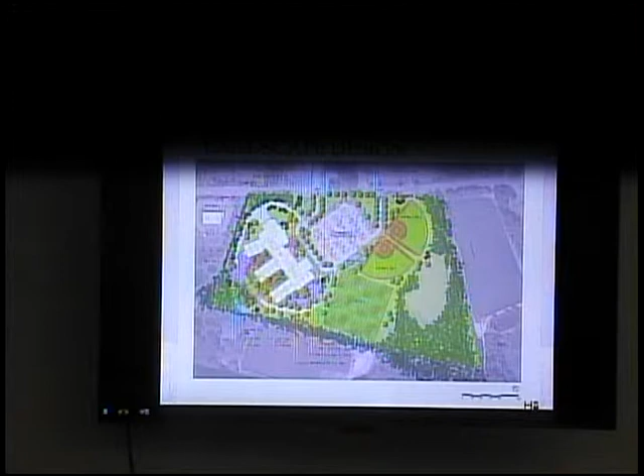Okay, so we have 5 slides that are associated with the landscape and the site. And so we can go back and forth on those if you have questions or if you need to get a closer look. This is an overview of the site, and we have some blow-ups of certain areas that help you sort of zoom in and get a better handle on what some of those areas represent. So you can see from just a quick overview that we've taken all of the thoughts and the considerations that you had presented previously about the direction of buses, where drop-off might want to be, the playgrounds, the fields, how many fields, parking -- this plan has taken into account all of those things.

Is there not a little pointer thing? Okay, well, I'll be fine then.

To start with, the entrance on the right side, the arrow there, that's where the entrance into the site is. And circulation is in that way and out that way.

Drop-off for parents is along the front of the building. For buses, the circulation is you come in the same way, and then you divert to this fire lane and bus route to the back of the building. Drop-off occurs there, and then buses exit out the left side.

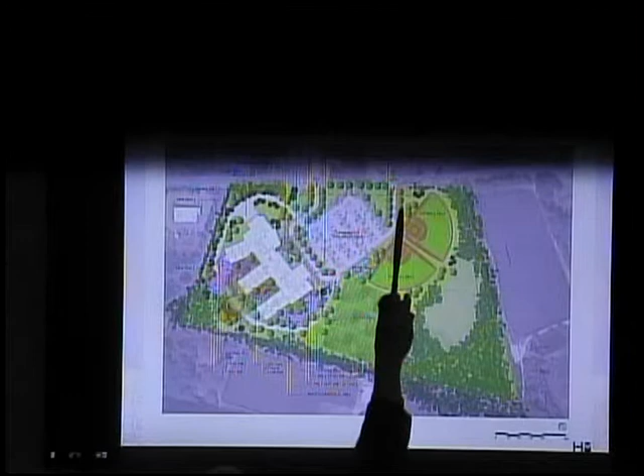Right, no, I understand that. I just want you to go over the route again. The trucks are not going back here at all. So they're gonna come in from here, along here, take this right, go straight around to here, back up, and then go back out that way.

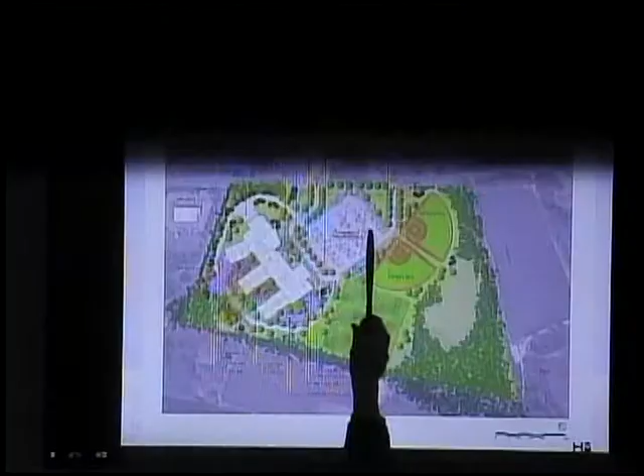It's a parent drop-off parking area. But you could easily have them come in the back row and loop around to avoid those front parking spaces where the parents are. You might be able to, with this radius, you'd lose some parking here. You'd lose some parking, but maybe that's the solution, to keep them away from where you have the parents coming in and out to pick up a sick kid or something. The back lot will be stuffed with teacher parking.

The thing is, parents don't come in and out that often, so that when the trucks are coming in at 8:30, they're already gone. They already all know that if they're at a place when that's happening, they have to stay until everything's moved on. Those trucks aren't gonna be parked there, they're just gonna be moving through it.

I think it'll work fine. I'm comfortable with that, I agree. That's how they need to enter, drop off and deliver. We don't want them in the back. We don't.

So two more questions on the trucks. Is there enough turning radius for the bigger trucks in the parking lot, with all the cars parked along there - will they be able to maneuver where the cars are parked? They will. Niche Engineering ran a truck turning radius template for this entire sequence of trucks, buses, etc. We had to remove about 2 car parking spots and stripe the area to get the radius. Right, we've lost some parking here for that reason.

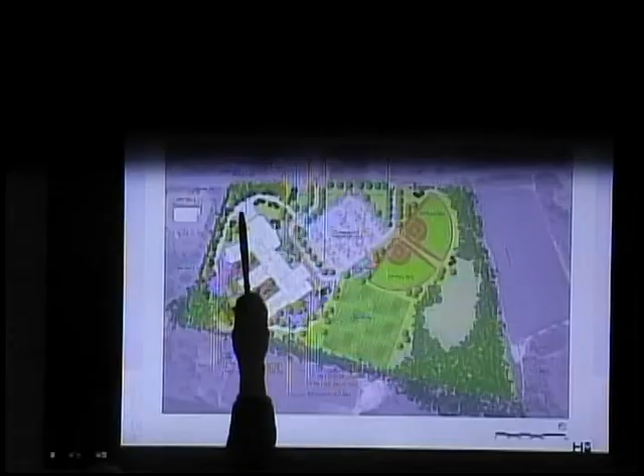And then the last question on the delivery part - when the truck is backed in to deliver, are the larger trucks completely away from the fire lane, or might they be? I can't tell the scale. It's 50 feet from the inside radius to the loading dock, so they should be outside the clearance of that fire lane.

What's the length of the longer trucks usually? Trailers are 53 feet, then you've got another 20 feet of tractor. So the question is whether or not, if they're backed up to the loading dock, they could block any of the road, or are they far enough away that they wouldn't block it? They'll usually jack the tractor around to back the truck into that loading dock - they're gonna have to have the tractor jacked around anyway. It's gonna be interesting to see how they jack it around the other way to get back out.

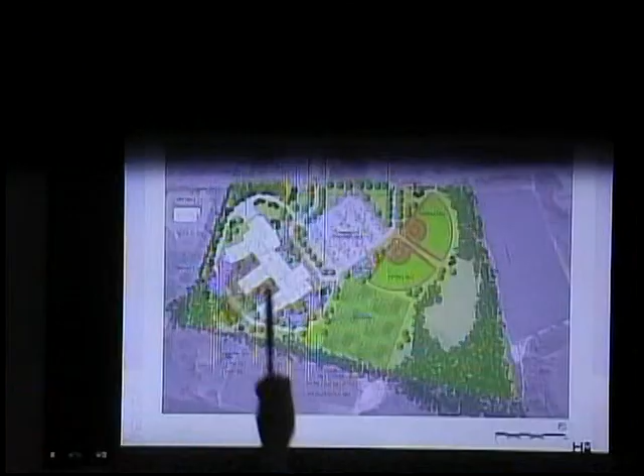Yeah, we did a WB50 turning - it's a computer program that takes the truck size and actually shows you the wheel positions. We ran into a couple of locations where there was a conflict with the curb, and we adjusted the geometry of the road. The templates are very conservative, so drivers can do much better than what the template is saying, but the template tells us that we can do all of this.

Would the template allow for a WB63 to go in there? I don't know - with a good driver, probably, but I don't think we've run it with that. I'm only asking because initially we may have some big trucks with furniture coming in. You always have the option, for a summer furniture delivery, of going into the front door instead of the back doors, if there's no kids there. Right, exactly. So the door will have - WB50 is fine.

The front door will have double doors with removable mullions, so occasionally - I understand you don't want to do it every day, but once a year - you need to take that mullion out based on what it is. You also have them back down the exit in the summertime for furniture deliveries. Plenty.

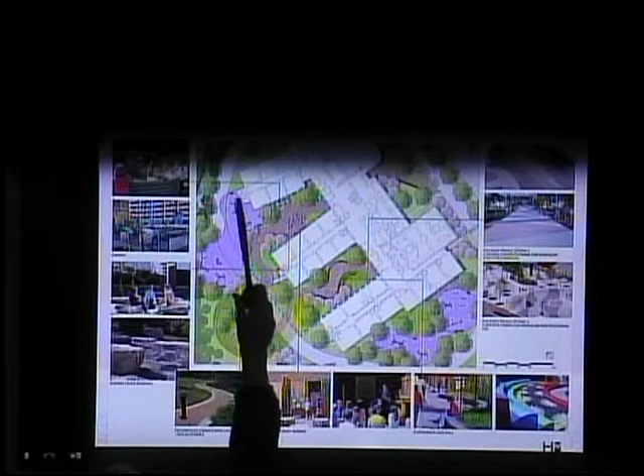So these are the outdoor classrooms for grades 1, 2, 3, 4, and 5, and also playgrounds for 1, 2, and 3 through 5 here. This is an outdoor play area that's mostly lawn or plantings, but it also has a lot of contours in it, so the kids can run up and down the manufactured or man-made slopes we're looking at here.

These areas are the beginnings of what the future build-up might look like. We're just getting into DD, or in the middle of DD, so we're looking at those now. As part of the base bid, those are basically going to be lawn areas with a curved asphalt path that runs from here to here and there to there. But in the future, that's the intent of what it would be.

You can see some ideas we've been throwing out - we haven't gotten feedback on any of this yet. But the idea is in this area we'd have an outdoor sitting area with potentially a classroom. This here would potentially be an outdoor kind of chalkboard where an outdoor class could happen, and some type of seating area like this or like this in this zone. There would also be some mounding in some of these zones to create a little bit of excitement in those areas.

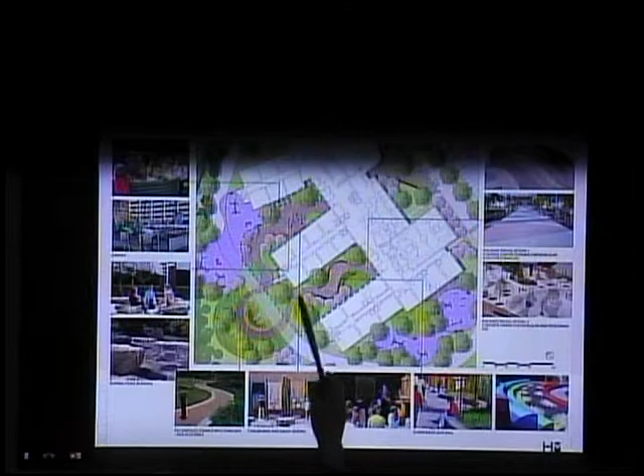In here, we're looking more at a kind of seating area, where it could also have some outdoor instruction, but it's also a place where kids can just run around - we're not trying to keep anybody from playing in here. We intend to have some hard surface and then some soft surface for that same kind of thing.

These are just some different ideas of what that might start to look like. We had talked about having some outdoor areas here for a potential outdoor garden for plantings. The idea was that kids would want a place to grow vegetables or flowers starting in May, and then someone might have to take care of them for the remainder of the summer, but they'd be there in the fall when the kids came back.

Picking up on the gardens, is there a sense of how that would be cared for and who would be in charge of it?

The Y program is perfectly willing to do the summer care. They enjoy that because it's all of our children that are there all summer, four days a week, which would be plenty. And then the science program we use has several growing units in every grade, so I think this would give them the opportunity to grow things outside as well as inside during the temperate time of year.

The last time you were at the elementary and explained some of that to the teachers, I had three teachers come to see me afterward to say they'd like to be involved in that process - helping with the design, talking about it, and taking care of it throughout the school year. So I'm pretty confident we'll have several folks interested, and as Liz mentioned, the Y absolutely wants to help. They currently have something they use in the back for a garden, so they would love to take that over. And the custodians grow tomatoes every summer.

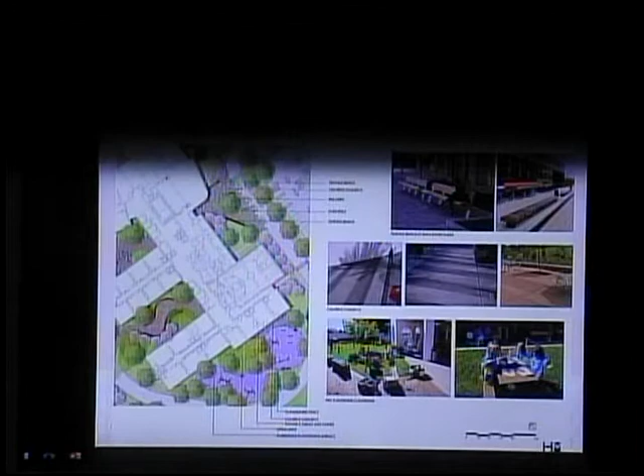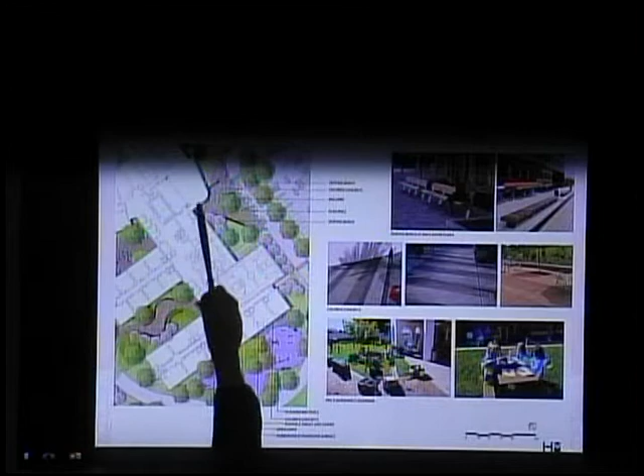Here we go. So in this zone would be where the pre-K and kindergarten have their outdoor play areas. And this area certainly is the front of the building, the front entrance. So we have some images of just some ideas of what that might start to look like, with some seating, with maybe some different types of pavement colors to bring a little bit of excitement to the front entrance.

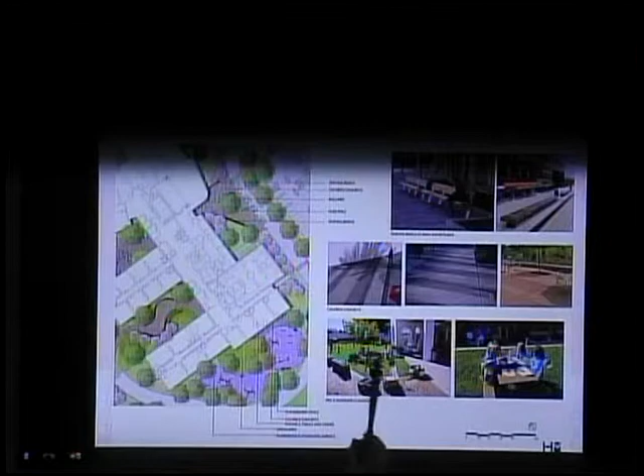And these here, both of these would be the green areas that you see here. These are the play areas that are actually play equipment, but these areas here might start to look more like this or this, where you have a little bit of lawn where there might be some movable furniture, or some toys or equipment brought outside, that kind of thing. The pre-K classrooms have doors that go directly to the outside, so they'll be able to go right out to that area.

Is it the same with the kindergarten? Kindergarten doesn't have doors directly to the outside, but they have a door at the end of the wing. So that would be their route to get out to the playground. They won't be going to that playground though, right?

They'll be going... Chuck, do you want to point out which one? The kindergarten is here. So they go out the end of the building to get to that space. Correct, absolutely.

Is that because we have 6 classrooms that will all be using that playground area? If you made doors directly out from the kindergarten, the 3 classrooms on the other side would have to go out and around. So everybody goes out the end and then they can go to that area. Every time we have a door in the exterior envelope it's a problem, it lessens the thermal value of the whole building, and it's another point of maintenance. So for lockdown, we have it at the pre-K, it's only 2 doors for the 3 classrooms, but for the 6 kindergarten classrooms, we thought it'd be better just to use the end door.

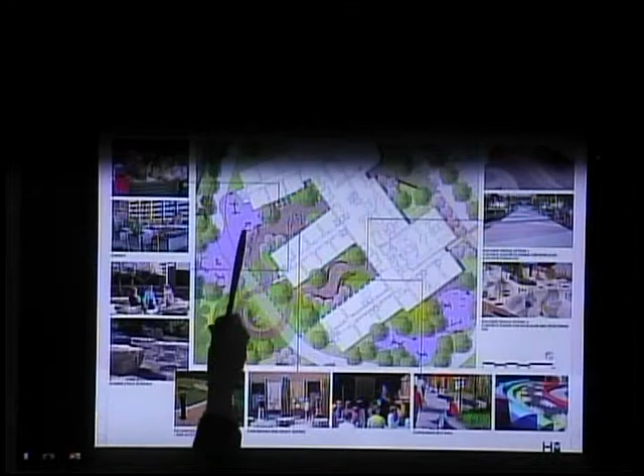It's intended more for educational use, but we can go back and look at the playground too. In fact we'll probably see it when we go to the next slide. Here's the playgrounds for 1 and 2, and then 3 through 5 here. And the idea is that this is going to be an asphalt drive around.

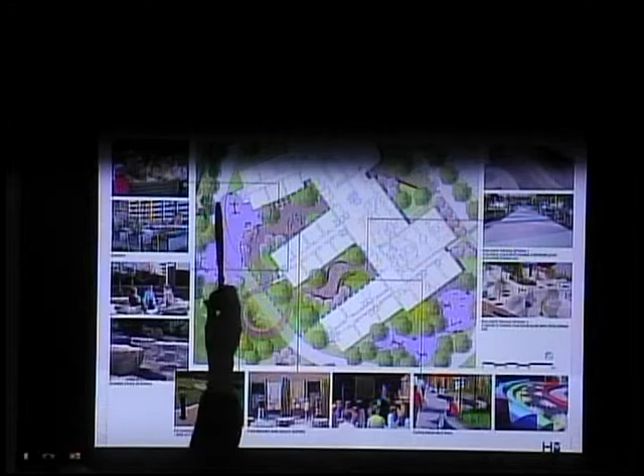We're thinking this is going to be resilient type pavement, so that when the equipment is on top of it, if there's a fall, it's a good place for someone to fall and not potentially get a broken arm or leg. This would still be asphalt, but we're looking at colored asphalt so that all these different kinds of shapes sort of flow through. We're not looking at colors like this, but the idea is that these shapes would flow through here, and so the idea that this is a fire lane would kind of disappear, becoming more of a play area or outdoor area for the kids.

Imagine we put striping on it for foursquare or other games. So it's a good way to use the asphalt we already need, but double function for play purposes. We don't have to build a whole other hardtop area.

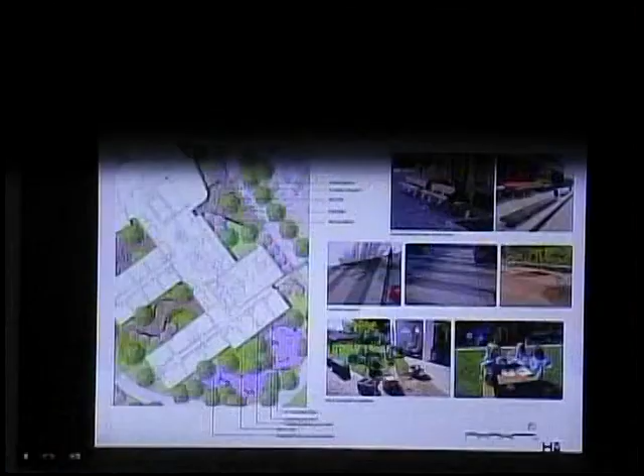In the last slide, or the second to last slide, we start to show some of the ideas of what the equipment might look like. These are some of the newer types of equipment you're able to get these days, and it's pretty nice, very sturdy. These kinds of things can get 5 or 6 kids on it. So instead of having a typical swing that takes up so much space because of the fall zones required in the area you can't play within, these types of things let you get a lot more kids playing within the same square footage.

There's some different climbing structures that we've done in a number of different locations. Just trying to show a couple of different companies that we used and what those things might start to look like. There's another one, too.

You can also build a slide into the hill on the other side, can't you? The hill in the back, yeah, like on the soft side. We could, I've seen that on a lot of playgrounds. That way the kids don't fall down the stairs, they just walk up the hill. That's a great idea.

The swing space is complicated because you have to have the entire arc of the swing, and then you're supposed to have a knee-high barrier that no one crosses into the swing zone. That's where most of the accidents happen, kids get knocked down. So for the amount of area that a swing set takes up, it's not like the days when we all grew up, it's all different. The amount of area a swing set takes up is for 2 kids, and we've sort of lost a lot of this area just to have 1 or 2 swings.

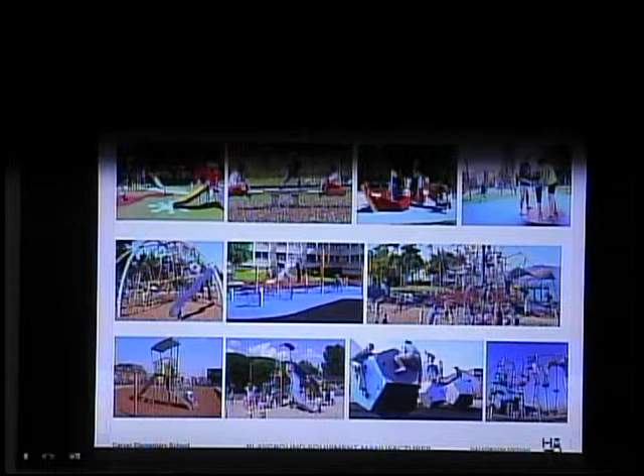So there'll be one grade out at recess at a time, the entire grade? That's what we have currently, and that's what works best based on our current campus.

So I'm looking at this, and I'm actually wondering if that grade 1-2 play area might be switched with the 3 through 5. I don't know, I'm just thinking we might want to tweak that, but your question is...

Again, we would likely have one grade out at a time, but the playground's separated like this. For example, kindergarten can have their play time anytime, and they have 2 recesses throughout the day, so that isn't going to interfere. And when you have 132 children out for recess at once, that's a lot of children, so yes, we tend to have one grade level at a time.

So when you say 1 grade level, you mean all of grade 1 or all of grade 5 would be out at one time? Yes. And how many classes is that at one time? Is it 6? So it's 6 classes of grade 5, say? In kindergarten, 7. And the range is from 122 to 138.

138, because another way to think about it might be that if you're going to have all of grade 5 out, and that's 25 per class, that's probably being generous, right? 25 times 6 is 150 or so. Yeah, that would be our biggest class.

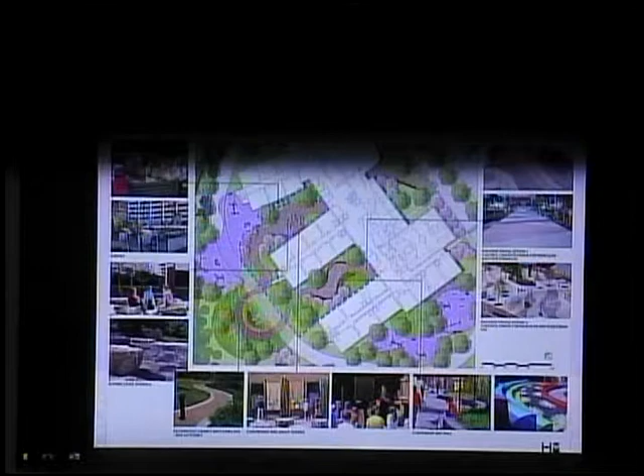Why don't you talk about that, it's a good idea. So a little bit of a more boring topic would be irrigation. I want to discuss that, the areas that we're showing as being irrigated, to make sure we're all on the same page.

Presently we're going to be using existing well number one, right about there, which is going to become the irrigation well. It pumps about 70 gallons a minute or so, and the areas we're showing as irrigated, that well will be able to handle that amount pretty much right on, because we can't go much more than that. With 70 gallons a minute, it'll be able to handle it.

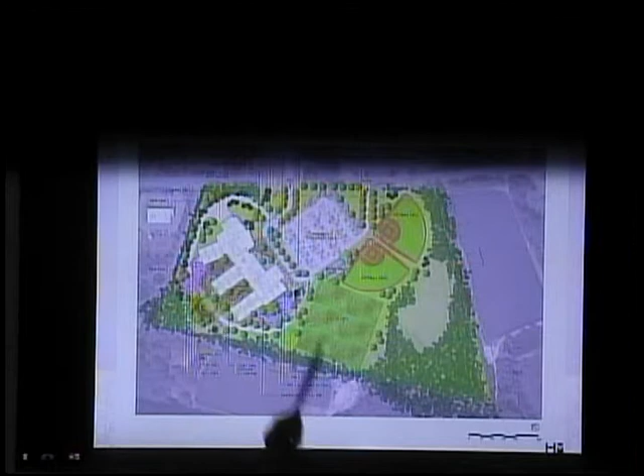Does it have to have the underground storage tank for the fire suppression? And so where's that going to be? Right in this area here. The grease trap will also be in that same area.

That's a good place. Will there be any fencing around the athletic fields? No. Do the softball and Little League fields need fence? None of our existing ones do. There'll be backstops, of course, but no outfield fencing - none of our existing ones have that.

Will there be fence around the basketball court? Is that something you're planning, Chuck? We had talked about a fence on this side, to keep the balls off the road. You can see it right there, actually - you can't really see it, but it's there, it's drawn. So it's a fence on that side.

Those courts will be used 24/7. I can go to the high school at night today, because we've got an outdoor one over there - there's kids playing out there at 10:30 at night, neighborhood kids, so they'll be very well used.

So what is more cost-effective - a fence on that basketball court area, or a row of sort of a natural barrier of trees or shrubs? Because all we're looking at is preventing the ball from rolling into the parking lot, correct? Well, it's mostly visual - it's a barrier for kids who are playing and get carried away and want to run off the court to try to make a play, and you're right up against that road.

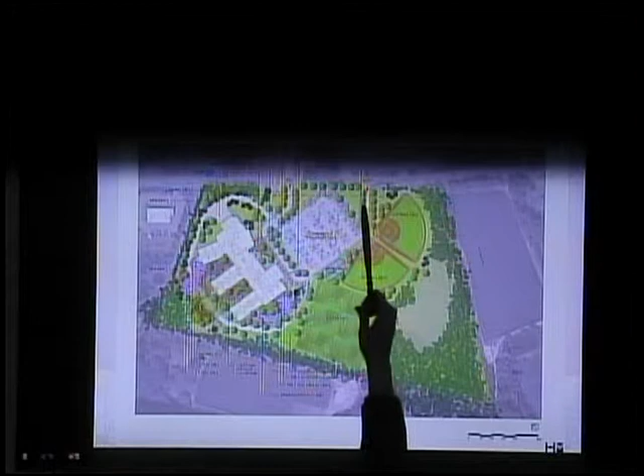Chuck, you want to point out the entrance sign? Sure, and there'll be an entrance sign right there. It actually says - stay right there.

We're not planning on any kind of reader board, just the name of the school. The thing is, the most effective communication tool in our town is that marquee, where you can put parent conferences.

We can put that in as an add. We advertise with the basic sign if we're running under budget - I think that's one of those items we can take a look at. You don't have to decide till later in the project. Or we can use our building use fund, that's how we bought the one at the high school - we charge outside organizations.

Actually, what we did for the fire station is, in the base bid, it requires all the electrical and the structure to be built. We found out it was about 4 times as much to put it out to bid than once all the electric's done - we can just go buy the sign after the fact and plug it in. That's what I mean. Dave, didn't we do something like that?

The building use fund accumulates very fast at the elementary school because of the Y program, so in less than a year we could put up a sign. It's the most effective communication tool we have - a manual reader board, not LED. With the new school we'd like to go LED, but right now it's a manual marquee.

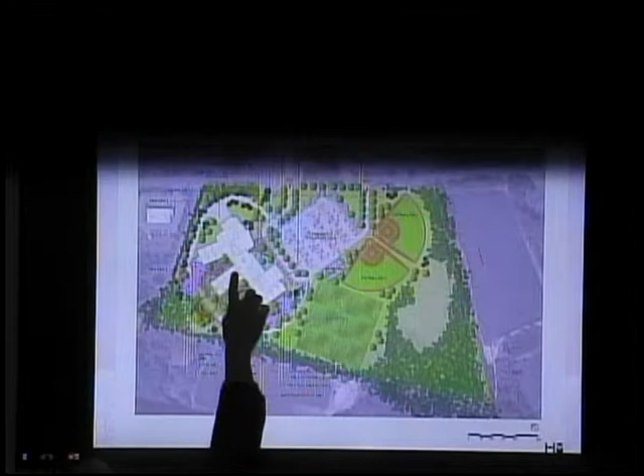You mentioned before about phasing a portion in with asphalt - can you go over that again and explain it in a little more detail? These two areas, the base bid on those two areas, there's no add alternate for those. The base bid is grass with a curved asphalt walk that takes on a quick little shape like that, not all that you see here.

The intent is that another company is being targeted to provide those as part of a gift to the school. So we're putting in the base bid, those are gonna go in, and then at some point that company's gonna come in and install those after the fact. We'll provide the full design documentation, then it's done as a separate project. But unlike those other areas which are add alternate ones, these are not.

Liz, what's the status of the Makepeace? I heard from them yesterday and they're very eager to meet with us. They're bringing in not just the neighborhood fund people, but other people in the company, and I think they really are gonna make a commitment. I don't know what it's gonna be yet, we're gonna set up a meeting with them next week. So I think it's gonna be a go, but how much we'll get, I have no idea.

Because we have $234,000 for the excluded alternate from the project. So that was what the budget was for building that, provided we get funding. I don't have a hope we'll get $234,000, but we'll get a start on some really good outdoor classrooms.

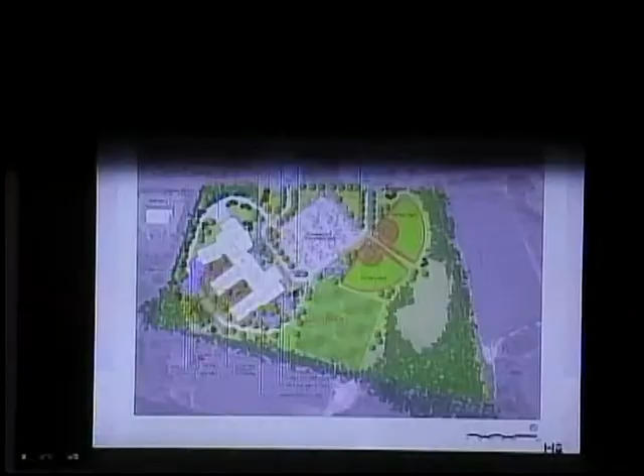Thank you, Chuck. Thanks, Chuck. Thank you, Chuck.

So now I'd like to go inside and just show you a lot of it. What we've done is focus on individual spaces.

Mouse dead. I'm doing it. Oh, now you're doing it. Thanks.

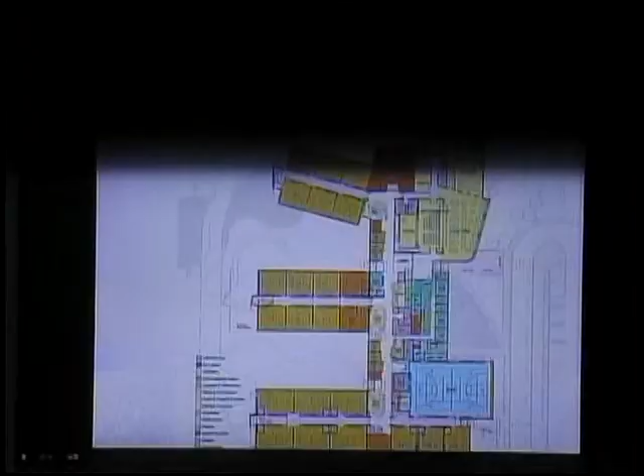So just quickly, on the overall plans, there's really not been any drastic changes since we last presented it. It's really just developing some detail and articulation. We start to put furniture into the spaces as a placeholder layout just to check how we're doing in proportions, and where entries, features, and walls are going.

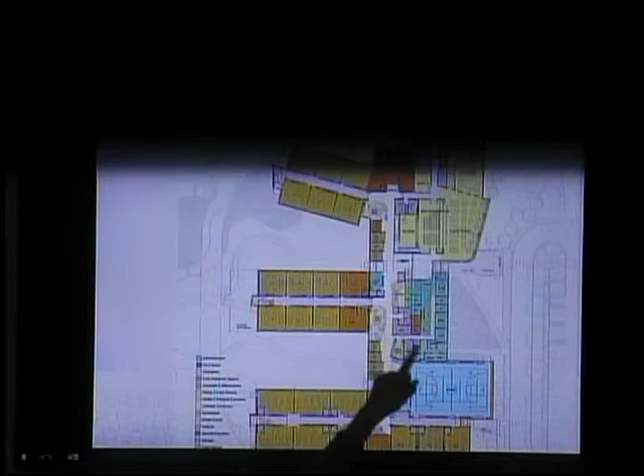But really, it's largely the same as it was. There's been a lot of development around the project areas, which were kind of left blank up until now. We're starting to check seating in the cafeteria, putting in mechanical chases and diffusers.

We're developing the book collection with a story room and some of the smaller offices for the specialists. So let me just jump into, unless anybody has a question on the overall plans, the individual spaces.

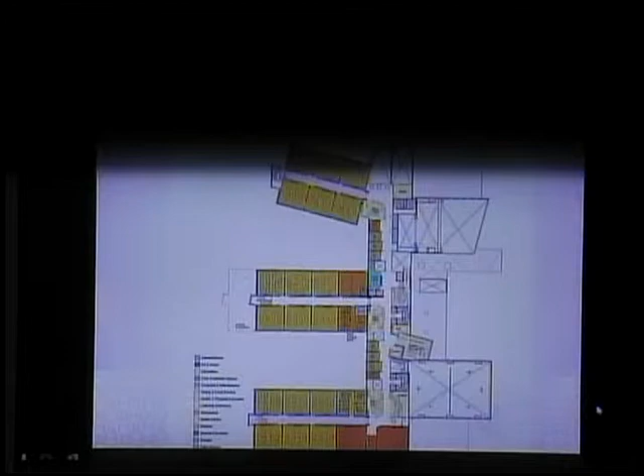Now, the first couple pages, I understand there's been some printing problems, so you may need to look at the screen. The first one we'll look at is the cafeteria and the multipurpose room.

And I want to start with the plan that has the two rooms with the operable partition in its closed position and the two different furniture layouts. So this is the cafeteria with its dining, and then a multipurpose room, which will normally not have seating in it, and it'll be for activities. But we're showing you how many seats could fit in the multipurpose room when the partition is closed as a small kind of performance area.

And what we're showing is about 143 seats, all looking at the stage. There'll be a roll-down projection screen within the proscenium of the stage, or the platform, and a ceiling-mounted projector, which will project onto that screen, so you don't need to roll the cart into the space.

So that can act as a kind of mini assembly space, even while the cafeteria is all set up as it is. The tables we're showing in the cafeteria are just a first stab, and we'll be getting more input about the actual furniture preferred. But using a mixture of round tables and long tables, this gives us a seating of 285 as we show it. I know there was a request to get as many as we could so you can be ensured you've been able to get 2 grades per lunch period if we have 3 periods.

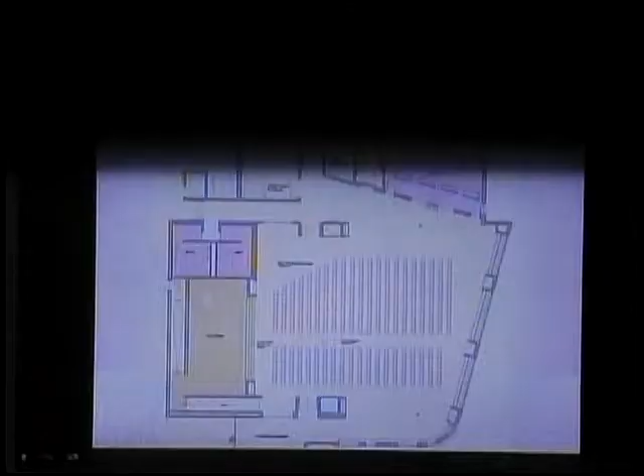We could probably get more chairs in, but there's a point where you get too far away and the sight lines aren't very good. So it's good to be realistic about how many you can get in there.

The partition we're looking at is a manual partition with 2 panels hinged together, and then each 2 panels are hinged together, and they get slid out along a ceiling track into position, with a pocket on either side where those are stored. It's fairly easy to roll them out and stack them together to form the complete wall.

Again, we have the gang toilet rooms, immediately accessible off that cafeteria through the double door up there, which would normally be open for school use, but could be closed off and locked so people don't have access to the rest of the school.

There are ramps which come up to the platform, one from the multipurpose room side and one from the corridor side, giving quick access to the 2 music rooms on that end. So they can be staging in the music room and come directly out onto the stage without going into the cafeteria itself.

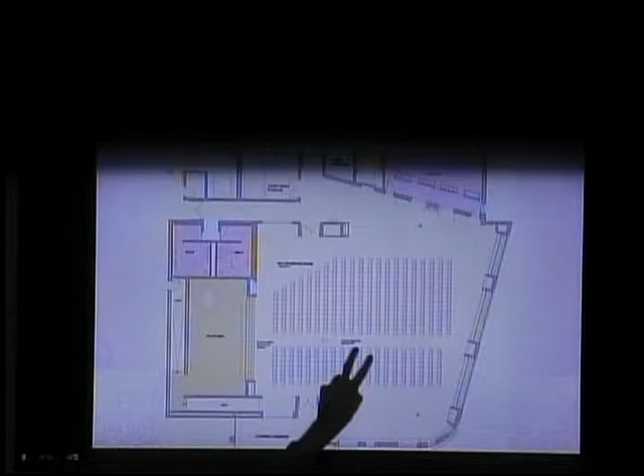You can start to see the beginning of the kitchen equipment with a service line. The students come in from the 2 doorways on the ends, then circulate toward the center picking up their food, and come out those two larger openings with cashiers on either side, continuing out into the cafeteria.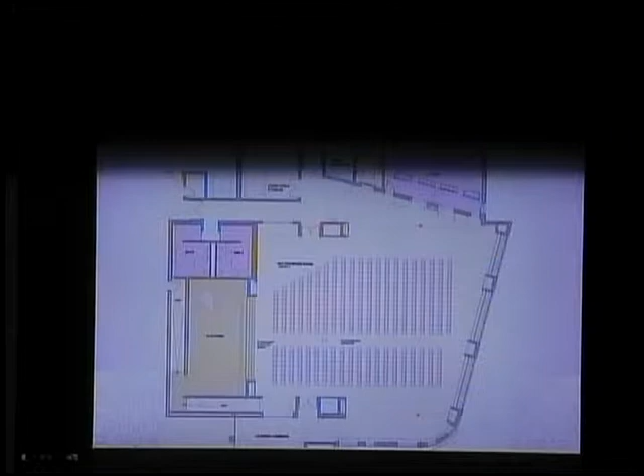But it's not a stage yet, because you have to have a whole bunch of different stuff if you have a stage, right? And there are a whole set of fire regulations around that.

It'll have a front curtain. We could have a back curtain along the back wall if you want that. Then some pretty basic theatrical lighting, maybe one bar of lights or possibly two - one facing the proscenium and one within the stage itself, using a fairly simple package lighting system where you have scenes set up and programs so you can just choose which scene you want. You don't need somebody with lots of expertise to run it. And then there'll be a sound system, a pretty basic but good sound system to go with it.

So the next slide is the gymnasium. This will have a poured synthetic athletic floor system. That's the extent shown in the pale blue color.

The entrance to it from the school is up the top. Those three doors there come directly in off the Learning Commons. It's also possible to enter through the pre-kindergarten corridor through these doors, and then for after-hours use through these doors here and in here.

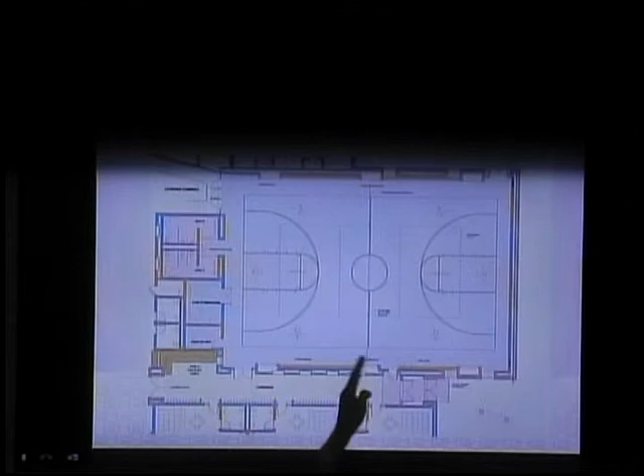There'll be a single bench on both sides, but in different positions on either side of the curtain. That bench, as we've done in other schools, can fold up so it's out of the way, or it can be in its down position and provide seating for maybe about 50 or so people on the sidelines.

There's a gym storage room here, and a health office in that location.

I think that was something—yep, that was a request at one of the early meetings.

We looked at wood versus synthetic flooring and life cycle durability. Cost-wise, it's actually probably a little bit cheaper than a wood floor. Dave had weighed in on that one, and you guys are looking at the same options over at the high school, I understand.

That's the preference. Up at Christa McAuliffe School, they had a wooden floor, but it was bamboo, and the physical education person I visited there didn't recommend it. It was very soft, and over time cracks became catches in the floor.

So the seating for parents or kids, we're looking at—is it similar to the middle school gym, how that has the 50? I'm trying to still picture how it folds out visually there.

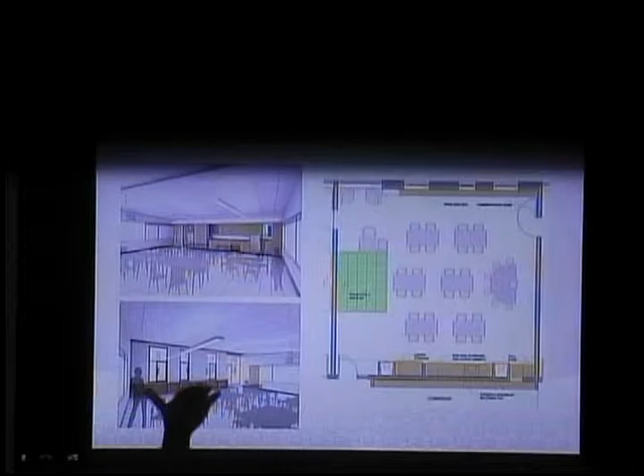However, sloping it up to the exterior allows us to get the heads of those windows pretty high to maximize the amount of daylight getting into the classroom. The slope actually helps bounce the light further back towards the back of the classroom, so we're really maximizing the amount of daylight being used. In combination with daylight sensors on the light fixtures, we're really driving down the electrical lighting use in the majority of the school when you look at it in terms of overall square footage.

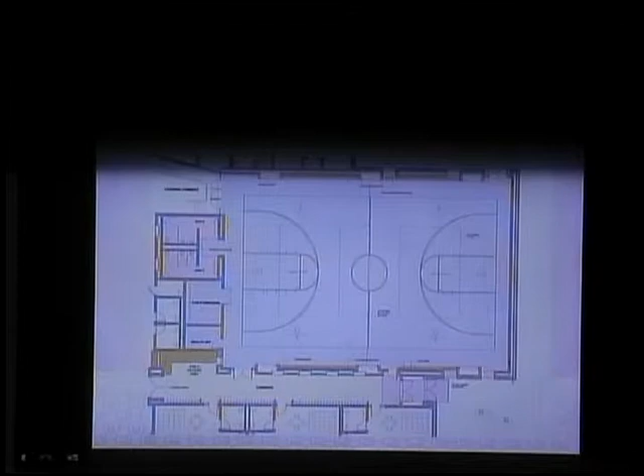Thank you. Can I ask you a question, Matt? That window there, on the drawing it looks like there's some seating there. That's a full-length window. Can you go back one? Yes, this one. The floor to ceiling window comes down to within about six inches of the floor. Oh, I like that. Yeah, it's a place where the students can get up close and have a close connection to the outside in that moment.

In the science program, there's some mirrors and reflective experiments that we don't currently have any light for. That'd be an ideal place for this.

Next time we're going to show you some of the exterior development. You'll see how that plays into our thoughts about the way the building elevations are shaping up on the classroom wings as well. Okay, we're getting there, for whatever reason, slow.

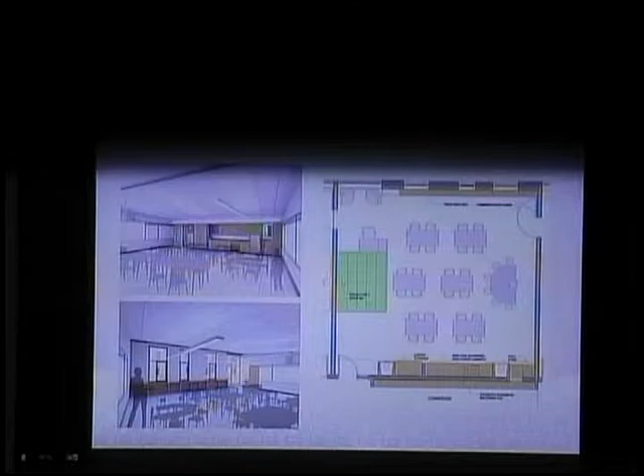Next will be the kindergarten classroom. So that's really a similar layout to the typical classroom, except it's about a third longer. It's the same depth, but just longer, because those are 1,200 square feet as opposed to the 900 square foot typical classroom.

Those also have a dedicated toilet room within them. The fixture sizes will all be at the heights appropriate for this age. Again, there's storage along the corridor wall. They have student storage out in the hallway in the corridor. These are open cubbies as opposed to the upper grades, which have lockers with doors, but it's the same width and same space that it takes up in the hallway.

So again, you have the entry door. There's a teaching wall, whiteboard, and projector. We're showing a rug that can be included as part of the furniture package, or two rugs actually. And then a layout which allows for the student tables plus a number of activity centers within the room, an activity table for the teacher, and a teacher workstation close to the teaching wall. This has open shelving along the perimeter, and the other walls allow for additional whiteboard space.

These also have communicating doors between rooms. On the end of the kindergarten wing, because these rooms are larger and in the eyes of the life safety code can have more than 50 people in them just by the sheer square footage, even though they won't actually, we have to treat this as needing two means of egress. So one means is out the door, and the communicating door acts as the second one, but on the end classroom we have to include an egress door to the exterior. But that's just for egress - we won't have hardware on the outside.

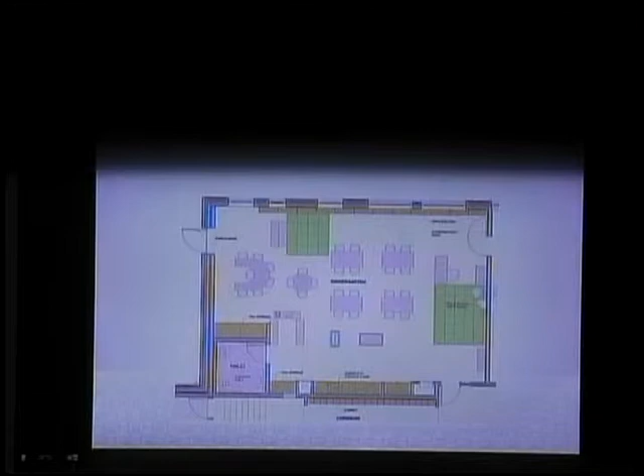Next, the pre-kindergarten classroom. It's similar content, just oriented in a long dimension. You enter in off the corridor on the top, and they have cubbies in the hallways as well. In this case, the storage wall is along the demising wall between the two rooms.

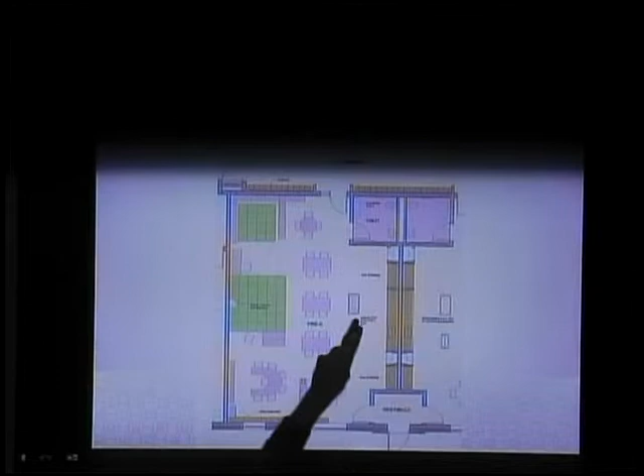With the sink, the displacement diffusers, the tall storage, and the cabinets, it also has a dedicated toilet room, and a very long teaching wall with the whiteboard, marker, and projector, plus some shelving along the exterior wall. As I mentioned, they have doors out to the playground directly, so we provided a small vestibule for a good airlock condition. These two rooms access this one vestibule to that door to the exterior, and you'll be able to come in and out that door.

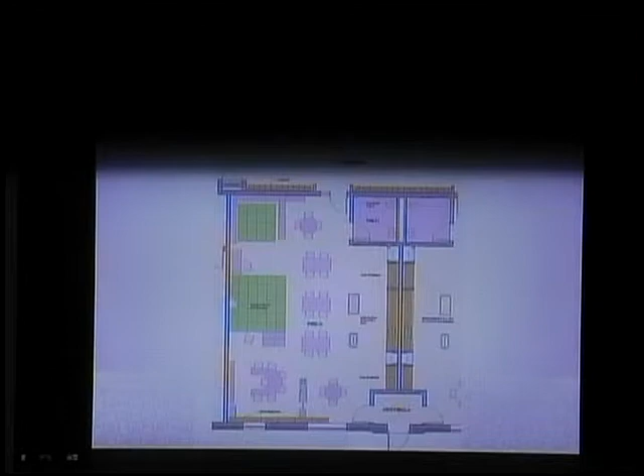SPED. The SPED classroom occupies about the same footprint as a typical classroom. It's slightly larger, but it has a toilet within it. In this version, which is the social emotional classroom, there's space for what's called the green room, which is the calm down space. The teachers asked that the access to it be off of the corridor, so that's what we've shown there.

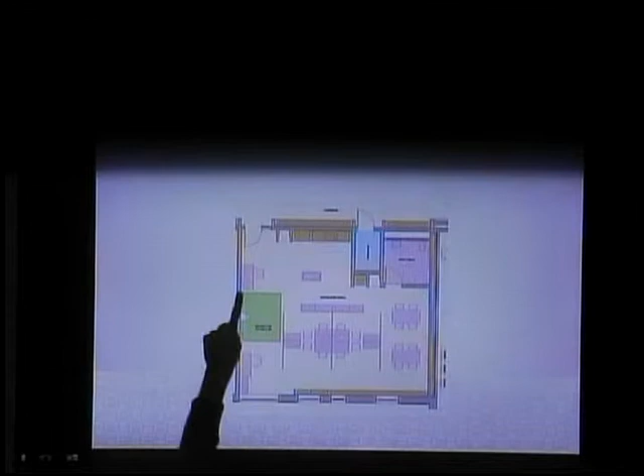Otherwise, the amenities are the same: counters, sink space, tall storage, laptop storage, projector with whiteboard, and open shelving along the perimeter. This just shows a layout with cubicle furniture and small student tables.

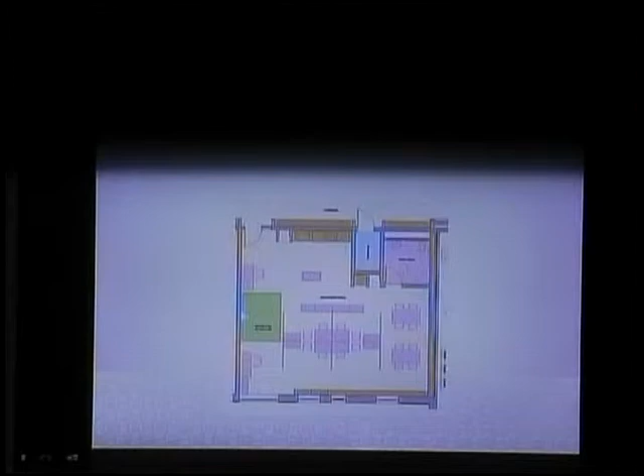The music room. We're showing the pair of the two music rooms, located at the end of the Learning Commons on the first floor. They're a double height space, which is good to have that extra ceiling height for the music use.

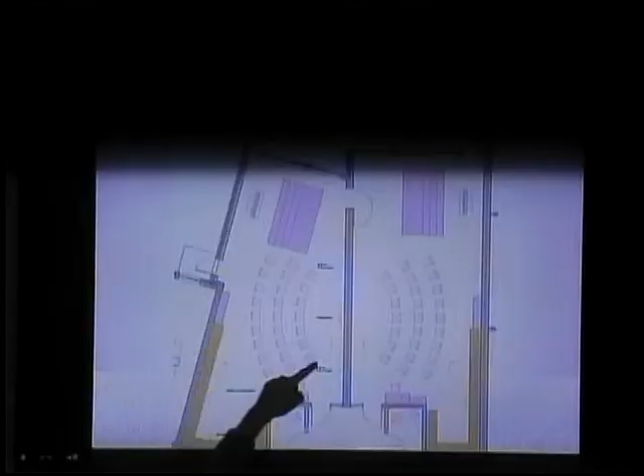When you come into the room, you're seeing the teaching wall. There can be two areas set up at any one time, given the size of the room. You're seeing a teacher desk here, and then some built-ins in this area for instrument storage, as well as some traditional teacher storage and counter space.

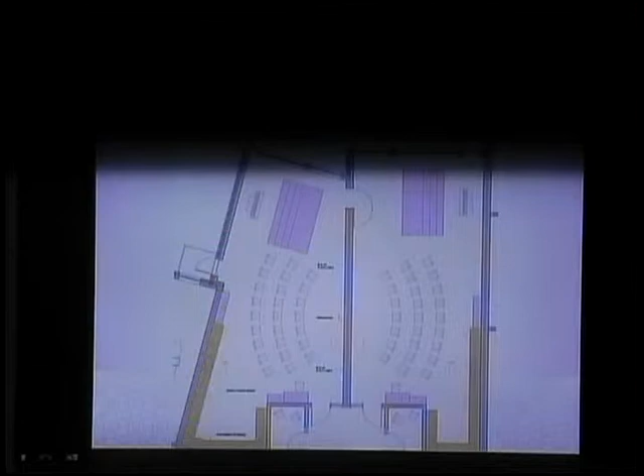Immediately outside of the music classrooms are two small practice rooms, which have access off of this shared alcove, which gives access to all the music spaces. You're seeing a very thick wall between the two rooms, and again, that's to achieve the isolation that we want. Next, the art room.

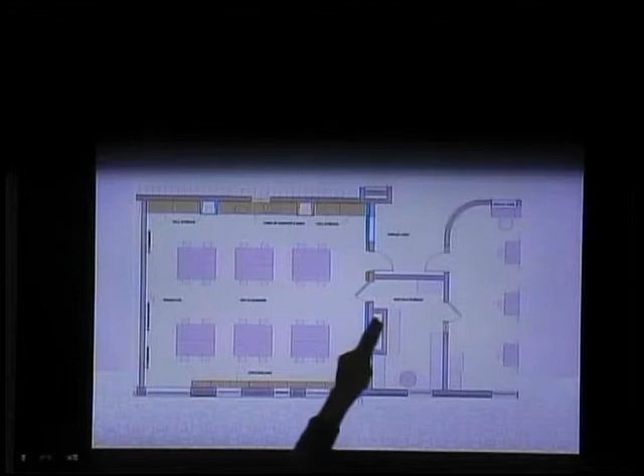In between the two rooms, we've created one large room which contains shelving for art storage, as well as the location of the kiln. This is a bit different than what we had when we talked to the teachers - we had two separate rooms, and there was an issue of being able to get access to the storage directly from each art room. So that's how we achieved that solution.

This looks good. Looks good, yeah. That was a good solution. Yeah.

Immediately upon entering into the space, there'll be a circulation desk, and behind that is access to the media specialist office. The office will have a counter with a sink, but then plenty of space for the other furnishings, perhaps a desk, a table, shelving, and a place for a book drop.

There'll be an interior window from that office out into the book collection for needed supervision. Within the book collection space itself, it's a lot of perimeter shelving. We tried to maximize that as much as we could.

And then in the freestanding shelving in between, which will be mobile, so it'll be on casters, could be positioned in different configurations. They've asked for a setup where there's an instruction area with tables and chairs, and then one wall with a projector and whiteboard on it. And then we're envisioning another area where there can be some soft seating.

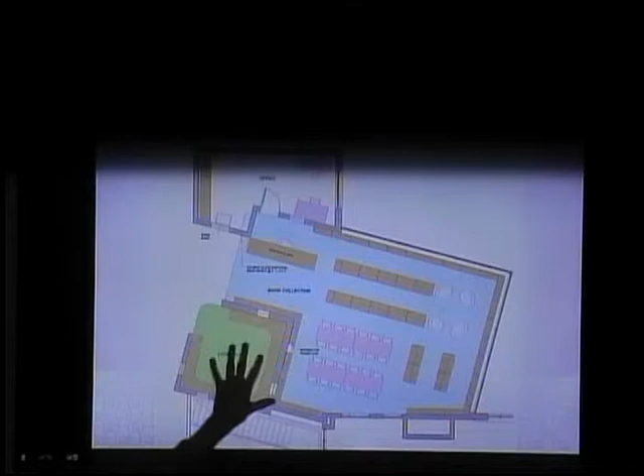The entrance to that story room is not directly off the book collection, but it's immediately adjacent to it, so that anybody in the rest of the school can use the story room because it's off of the Learning Commons. However, it's closely associated with the book collection and the media specialist. The story room will be carpeted with a bench around the perimeter of it.

Those rooms all get windows to the exterior and have lots of natural light.

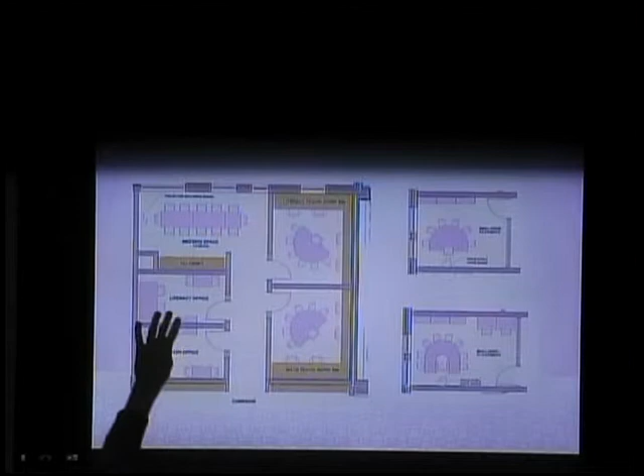This is the suite of offices, called the collaboration suite, which includes the literacy and math specialists. So there's an office for each of those, as well as one literacy teaching workroom and one math teaching workroom, each with enough space both for the teachers and a group of students to work together. And then that will have one open shared meeting space with one wall for a whiteboard and projector and some storage along another wall.

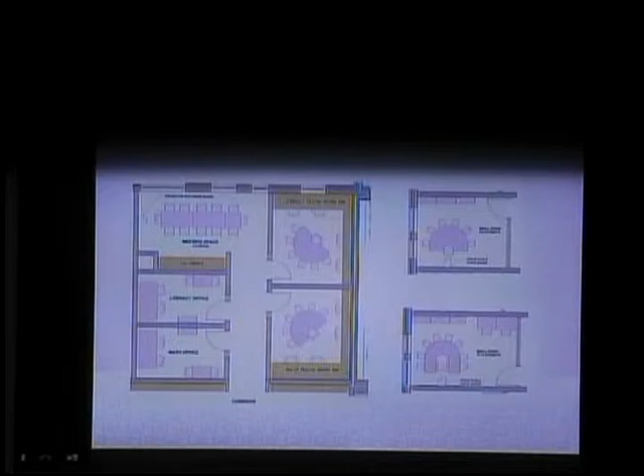Can we have that literacy center instead of literacy suite? Yes, I looked on there, it doesn't say suite anyway. Yeah, we try not to put that in writing. Center is a good word.

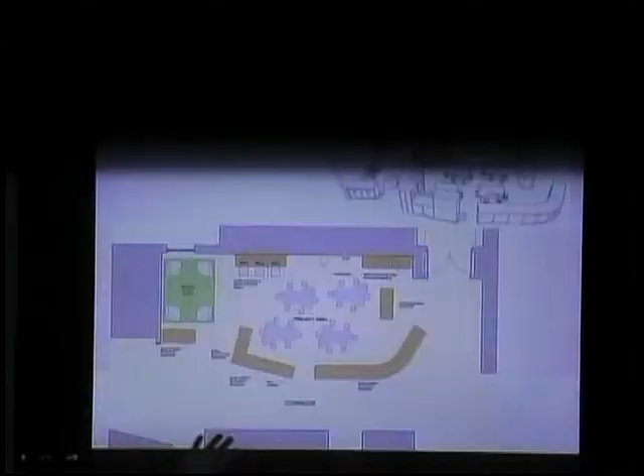I like that. Project area. Okay, so again, there's a project area outside of each grade. They vary in size a little bit. This is a version that's showing kind of the largest size, but they all have room for a similar layout.

With the tables and some perimeter shelving, some counter space. Some of them may have enough room to have a soft seating area. Some of them might not.

But what we're seeing is some low counters here, which will provide storage on the project area side, but then lots of display space and workspace. A lot of three-dimensional work can get set up there. Science projects can be out on display there. So as people are walking back and forth, it's a really great interactive tool to involve everybody in what's going on.

You're seeing a layout with tables and stools. These tables are a type that can actually lock together and form a larger group table. There's a counter over here for demonstration purposes, so a teacher or educator can stand behind it and be working on something. There'll be power provided to that.

I lost my screen again. And they can be doing class demonstrations as the students are looking on.

There's also a wall, if you notice on the top of that picture, that'll have the projection screen and a projector and a whiteboard. Over here are base cabinets with a sink, upper cabinets above.

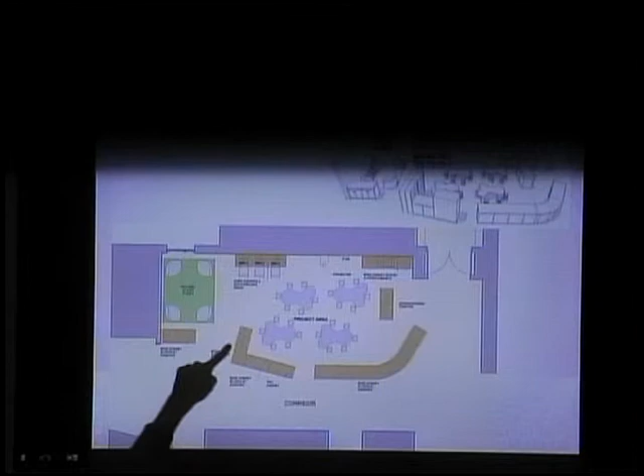Over here, a counter that you can pull chairs up to. There could be computers set up there. And then some book shelving in this built-in, where portions of the book collection can be housed temporarily for a specific subject that's being studied, and some taller cabinets around that space.

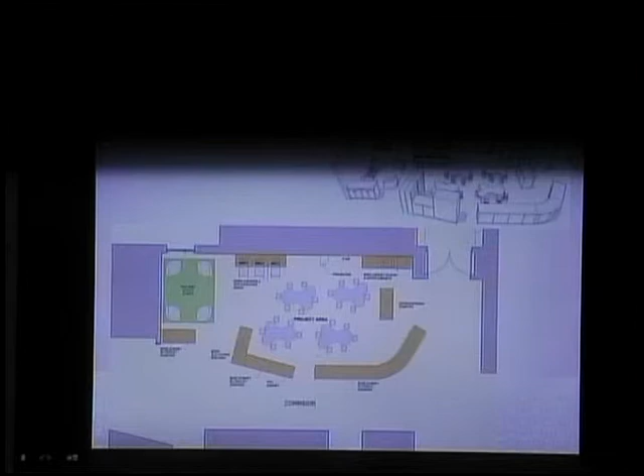And you get just a little bit of sense of how that's shaping up in that three-dimensional view above. And then lastly, just an overall view, three-dimensionally looking down at the second floor of the Learning Commons, seeing the three project areas on that floor, populated with their built-ins and furniture.

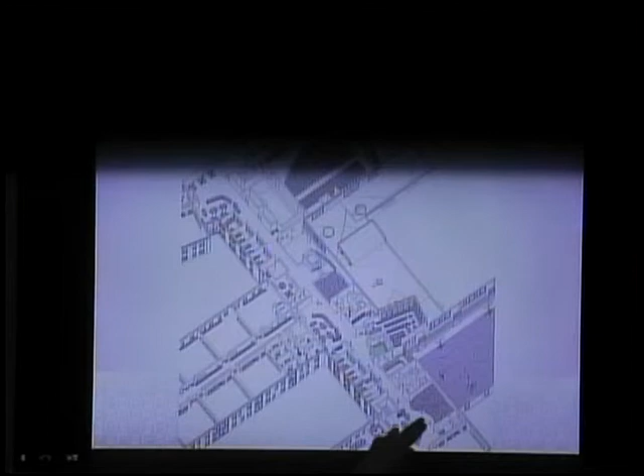And then the book collection here, the gym, looking down on the other end, the cafetorium. In the center is the lobby with the gathering area on the first floor, and then on this end, the gathering area for the second floor. This gathering area is immediately adjacent to this project area, while this gathering area is close to the project area on the first floor. In between all those project areas, again, are the small group rooms with their windows looking out.

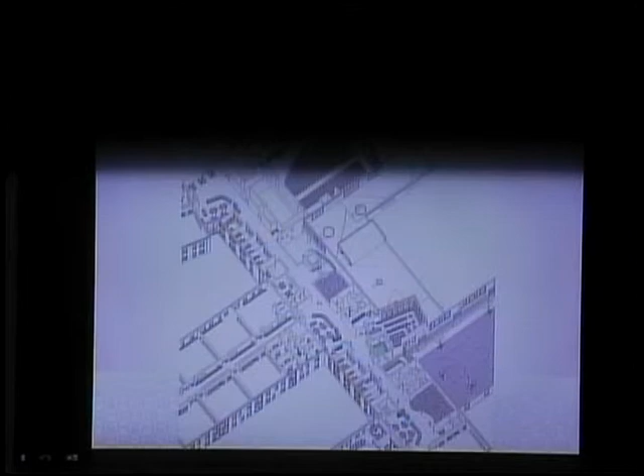So, that's where we are at this point. Any other general comments or questions? And if not, I can give it to Chad.

Okay, I just have to say, wow, it is fabulous. It is taking such nice shape. So much of what we have talked about, we've articulated this to you, and you put it into a very well developed design.

It's fabulous. Yeah, I think meeting with the teachers was really helpful for us, just to get that level of input, confirmation of some of the things we thought they wanted, and then adding in some other features that we hadn't thought of. And they were incredibly appreciative, because they were asking for hard things like outlets.

Yes. Matt, it's interesting as I look back at the Christa McAuliffe School and I can picture what you're telling us a lot better because I was up there. That's good. I get a good picture of what that is.

So I'm a little confused, Ruby. Do you like it? I haven't been this happy in a long time. I'm teasing you. And excited, just so pumped for the kids and the teachers. It's exhilarating to see how it's all taking shape. When the teachers heard we were getting a kiln, they went, oh! Small things that can make a difference. Yeah.

Next, we're going to talk quickly about the master schedule. This is, for the most part, the same schedule everyone's been looking at for the past year or so. The black bars below the activities are the baseline schedule we first agreed upon, and the green and red bars are the current scheduled dates. If you look all the way down to the construction windows, we're exactly on target, no deviation at all. So good news there, and we'll drill down on the next slide to some of the key dates you really want to look out for.

So in early February, we're looking at a design development drawing set being issued. That set's going to go off to the design review teams and the estimating teams. Estimating teams will do their initial estimates. We'll have the list of value engineering options, and then we'll have an estimate reconciliation, and then ultimately that all gets submitted to the MSBA.

After that, in April, we'll be doing the same thing for the 60% design set, and then again in June for the 90% design set. The MSBA's final review of the design documents happens at 90%. We do submit them at 100%, but at the time we hit 90%, it's considered to have gone through the MSBA steps. Once we have their feedback incorporated, any additional value engineering incorporated, input from this committee, and the estimates reconciled...

...we will put the 100% design package out on the street on August 19th. First, we'll have the filed sub-bidders, so a period of roughly 3 weeks, and then another 3 weeks for the general bids, all leading up to a notice to proceed for a general contractor, hopefully by or around October 1st, which is our target right now. So those are the key dates to watch out for.